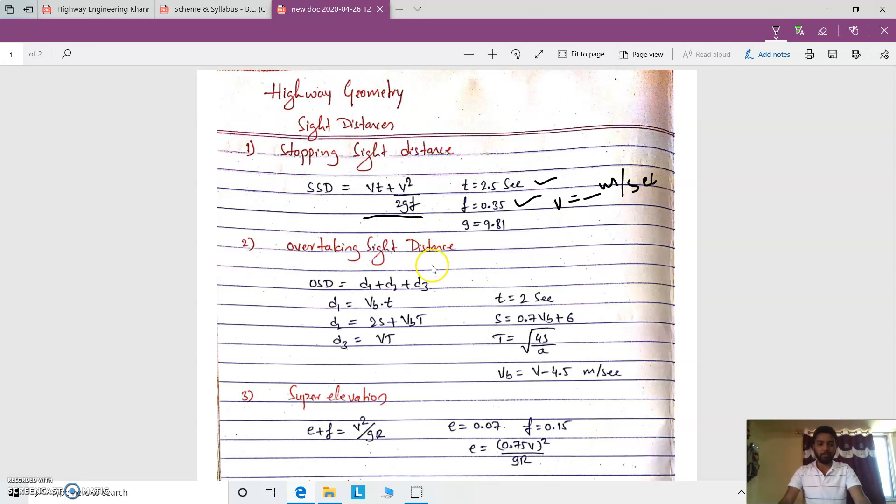Similarly, the overtaking sight distance is also discussed. Here the overtaking sight distance is the sum of d1, d2 and d3, corresponding to the overtaking vehicle, overtaken vehicle and the vehicle coming in the opposite direction. d1 is the distance between overtaking vehicle and overtaken vehicle before the action takes place, d2 is the distance of the actual overtaking operation of vehicle A, and d3 is the distance traveled by vehicle C during the actual overtaking operation of vehicle A. You might remember this.

Distance d1 can be calculated using the velocity of vehicle B, the overtaken vehicle, with the reaction time of the driver, which is given as 2 seconds, and Vb is the speed of the overtaken vehicle. d2 is 2s plus Vb into t. Here t is not given because the time depends on many factors: the speed of the overtaken vehicle, acceleration of the overtaking vehicle and gradient of the pavement. So t can be calculated as root of 4s by a, where a is the acceleration.

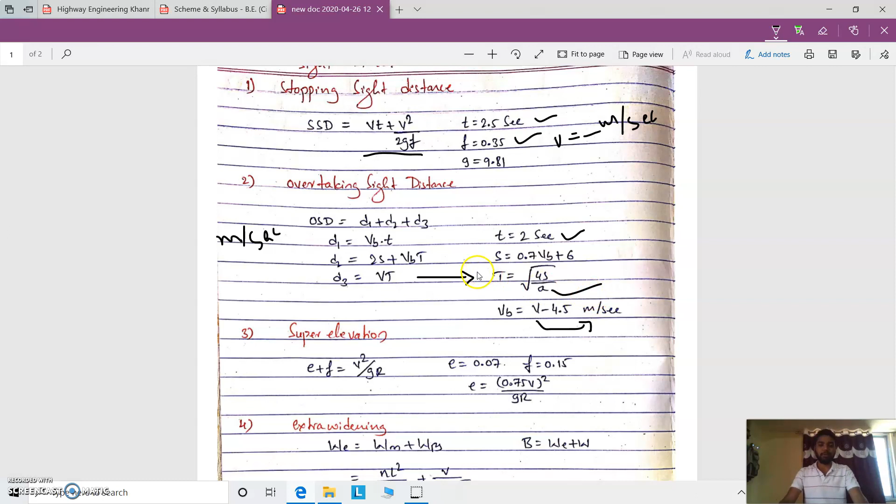If it is not given, we have to remember that table that is considered in the lectures of problems on the overtaking sight distance. And next geometric condition, we have considered super elevation. That super elevation is considered to be E plus F equal to V square by GR on full condition.

In some cases for mixed traffic condition, we might have considered E equal to (0.75 V) whole square by GR, right? So here 0.75 V is considered to be 75% of the speed, considered in mixed design, in the sense mixed traffic.

And here E is restricted to 7%, or you can say 0.07, and F is a lateral friction 0.15, because whenever the super elevation is considered, the centrifugal force will tend the body to move sidewise, and this sidewise movement is resisted by lateral friction. The value of lateral friction recommended by code is 0.15, and E plus F equal to V square by GR.

And we all know that to calculate this super elevation, we have different steps. In the first step, we need to consider mixed traffic condition. Later, we need to check whether this mixed traffic value is equal to 0.07 or less than 0.07. If it is less than 0.07, you can go with the obtained value. If it is not, we have to consider the next step,

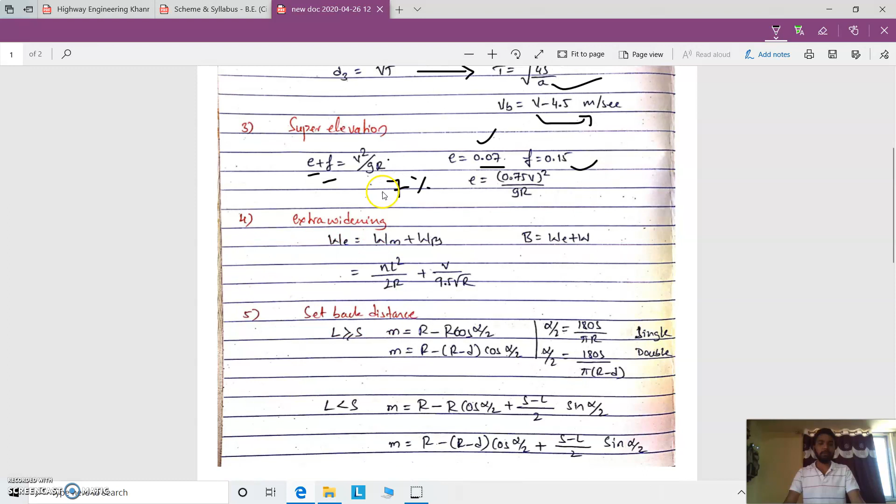Similarly, the next geometric condition is extra widening. In this extra widening, mechanical and psychological widening are considered, because the rigidity of the wheelbase is considered for the vehicles, and the psychological condition of the driver is also an important factor here. So WE is the total extra widening, that is mechanical widening plus psychological widening. Mechanical widening is NL square by 2R, and psychological widening is V by 9.5 under root R.

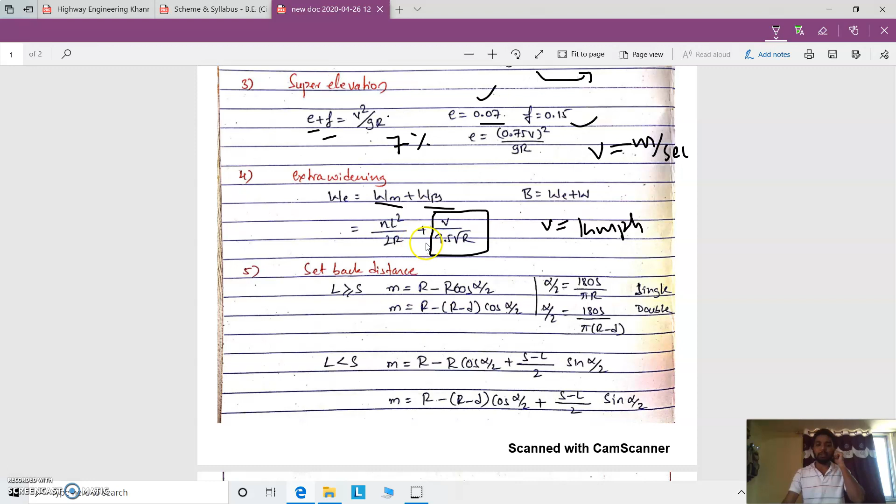So up till super elevation, we can consider V in meter per second, so that you can completely go with this equation. But in extra widening, this formula is recommended by Indian Road Congress, and this recommendation is given in V kmph. So we need to consider V in kmph for this extra widening. Here N is the number of lanes on the highway, L is the length of vehicle, R is the radius of the curve, which is less than 300 meter, V is the speed of the vehicle, and R also the radius of curve.

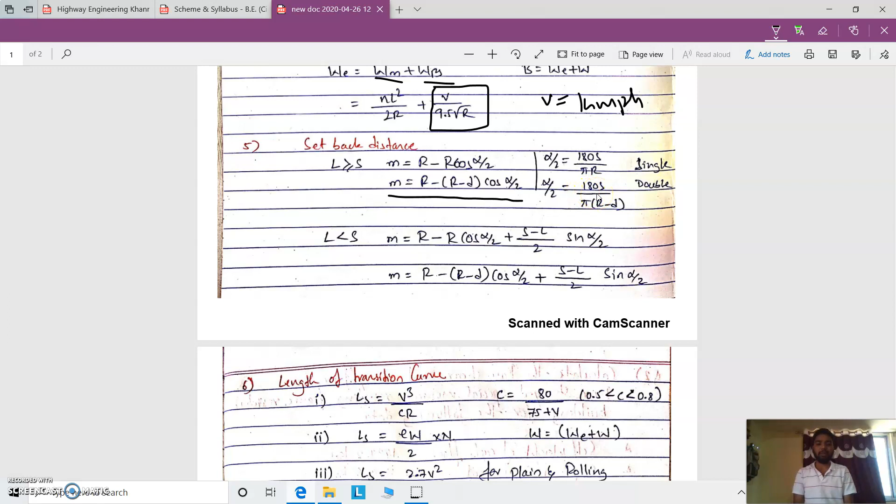And next geometric design is setback distance. The setback distance is considered for single lane road and double lane road. Whenever a single lane road is there, R will be its full length, and R minus R cos alpha by 2 will give you the total setback distance when the length of the curve is greater than or equal to the sight distance. And whenever there are two lanes, we can consider M equal to R minus (R minus D) cos alpha by 2, and here alpha by 2 in radians you can convert to degrees by multiplying by 180 by pi.

And here the length of transition curve is also discussed as another geometric property. So in this case we have been given three conditions. The first one is rate of centrifugal acceleration of the vehicle, the second one is rate of introduction of super elevation, and the third one is by the empirical formula given by IRC.

So the first one is considered to be V cube by CR, that is centrifugal acceleration. This C value is considered as 80 by 75 plus V, and again V is in kmph here, we need to remember this. V is in kmph, and that means C will be greater than 0.5 and less than 0.8.

And here for the second condition, rate of introduction of super elevation: E into W by 2 into N. When W by 2 is considered, the pavement is rotating about its center, and when EW into N is considered, then the pavement is rotated at its inner edge.

And here N is the value for plain, built-up or hilly areas. In plain areas it is given as 150, in built-up areas it is given as 100, and in hilly areas it is given as 60, I think, right? These values have to be remembered as the N value. We have to substitute here, and W is considered to be extra widening plus actual width of the pavement. Substituting all these, we'll get the length of transition curve by rate of introduction of super elevation.

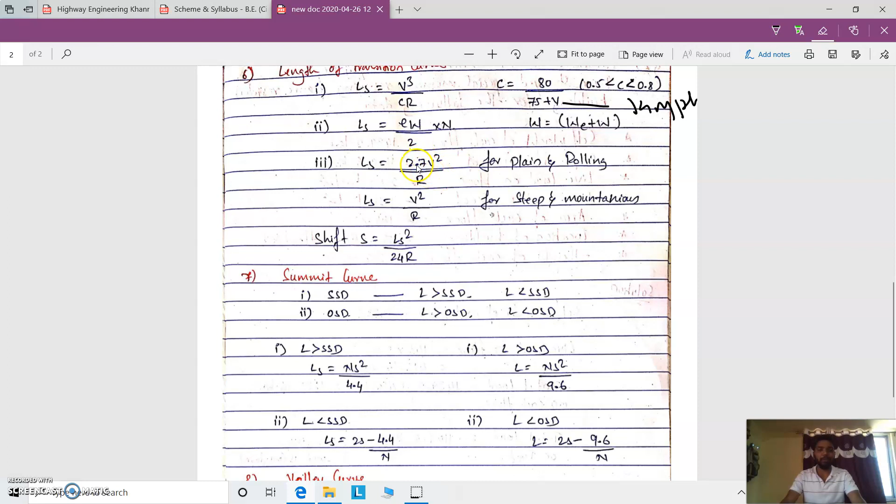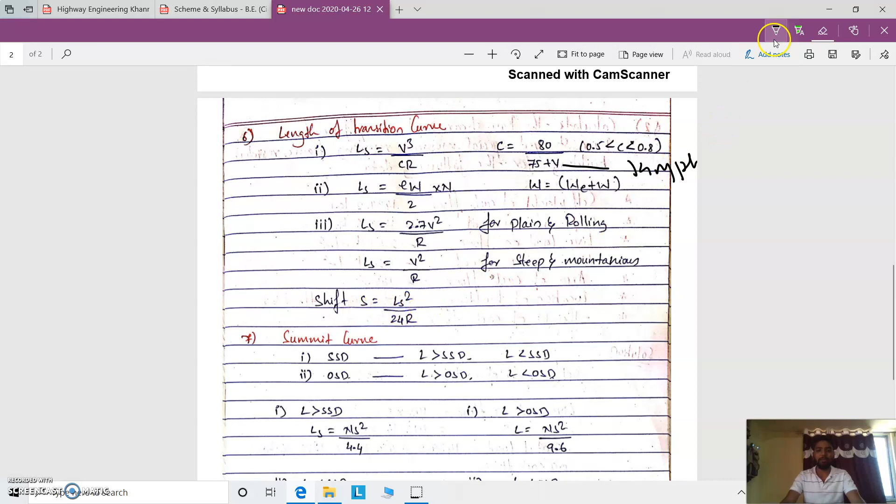Similarly, the empirical formula for plain and rolling terrains is given as 2.7 V square by R, and for steep and mountainous terrain it is given as V square by R. We can consider the shift, that is Ls square by 24R. Once we calculate Ls, the length of transition curve, the maximum obtained value is to be considered as the length of transition curve, and that is substituted here, then you will get the shift S. And next, summit curves and vertical curves.

For vertical curves, stopping sight distance and overtaking sight distance are considered to decide the length of the summit curve. In the first case, if length is greater than stopping sight distance, then Ls will be NS square by 4.4. This 4.4 is obtained by considering the height of the driver's eye and the height of the object. And if L is less than stopping sight distance, then you can consider 2S minus 4.4 divided by N.

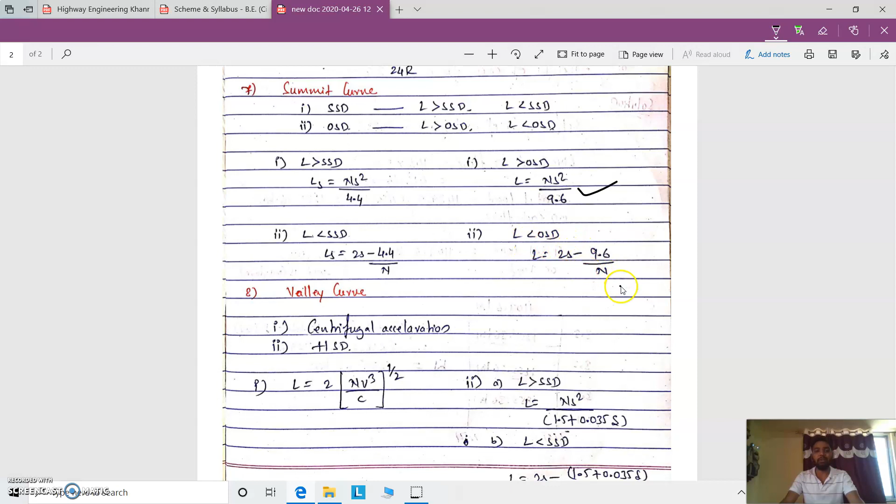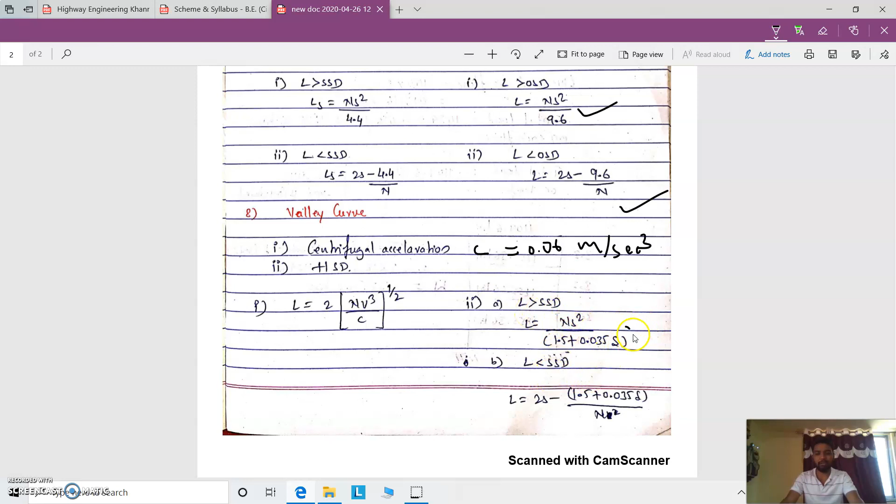For centrifugal acceleration, you can have L equal to 2 into (NV cube by C) to the power 1 by 2. And for headlight sight distance, you again have two conditions: L greater than stopping sight distance and L less than stopping sight distance. Once we know the values, you substitute the deviation angle and stopping sight distance, and get the total length of valley curve. Similarly here we have to consider the value of N: 2S minus (1.5 plus 0.035 S) divided by N. N is the deviation angle.

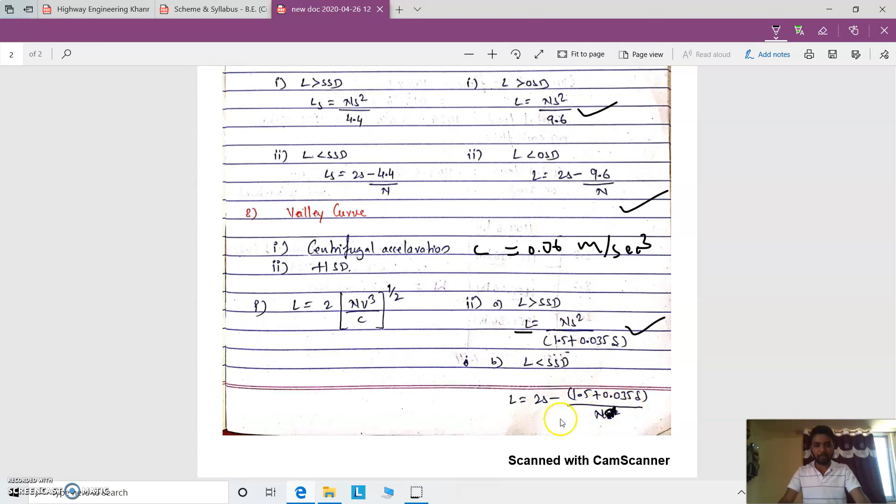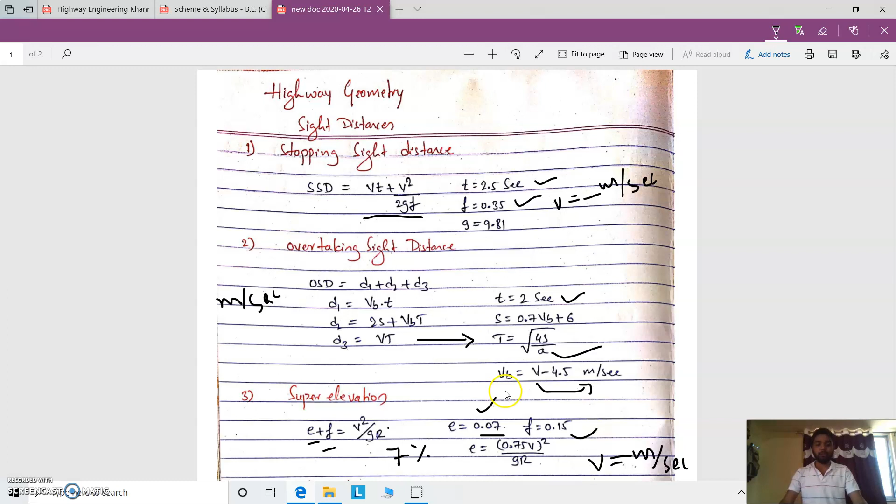This much of geometric design is considered in the second module, and the values recommended by IRC are to be remembered. Once we remember these formulas, we can easily go with the problems in geometric design. So with this class I will end the second module. In the next class I will start with the third module.